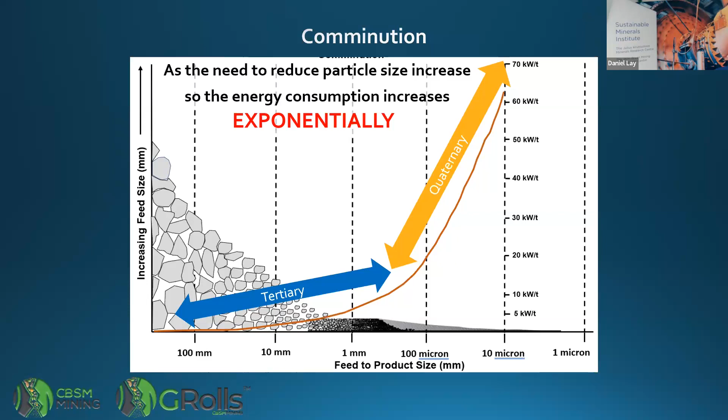In a typical mining operation, comminution takes about 10% of their power consumption, and mining comminution around the world accounts for around 1% of global power consumption. So that 10% of a mining operation accounts for about 1% of the global power consumption.

In the cement industry, comminution accounts for around 70% of an operator's cost, and again that accounts for around 1% of global power consumption. So comminution is a very energy intensive, very power intensive, and very costly part of mining and cement operations.

And with power prices going up, and we're all feeling that pain, it's going to get more and more. Also, another large cost for mining operations is media, which can be up to 17% of cost, and that's a factor that's just there, but people don't really realise how much cost the media adds.

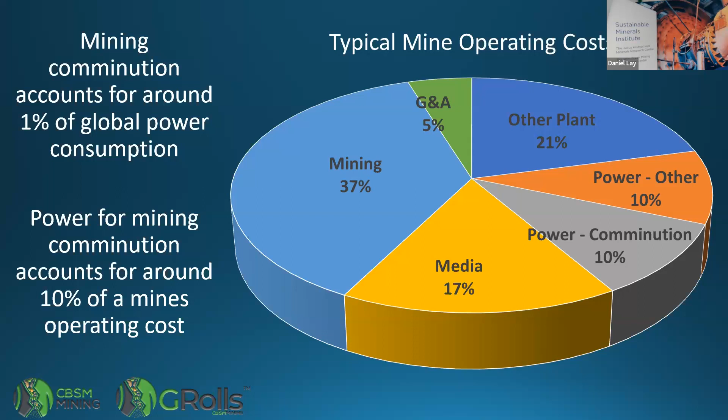For a mining operation, these are all the current comminution type technologies. Going from the top, you get very coarse feed, and obviously it's very difficult to get all in one pass down into your really fine material. So you have a series of crushing and comminution technologies. You go from your primary crusher, which gets the real big rock from the mine, then through a series of crushers and then mills to get to the really fine. Each of those technologies has got a nice sweet spot where they operate really well.

Beyond that, they struggle on that. So this gives a bit of an idea. At the top, you've got your AG mills and your SAG mills. Then there's probably rod mills.

But then in the middle here, we've got HPGR, which is high pressure grinding rolls. And then the VRM is the vertical roller mills. These have started to come into the mining sector as comminution units, and I'll talk about that more later on.

As you get further and further down, they can take some quite coarse feed. But then you get down to the more specialist ones, the ball mills and the stirred mills, and the vibrating mills and that sort of thing, talking about trying to achieve those really, really fine particle sizes that some of the products need, or some of the ore bodies need.

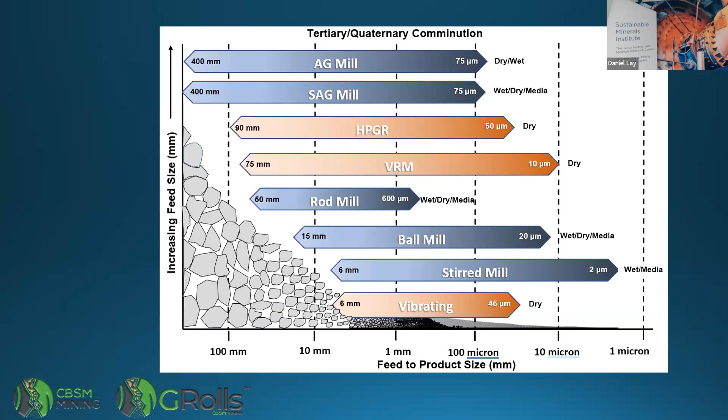Just a quick snapshot of the comminution global market. It's about a $2 billion a year market in 2020. Ball mills are about a third of that market. Now, ball mills are the traditional - I'm talking about ball mills, SAG mills, AG mills, in a similar sort of vein. They're all lumped in there, and they've been the traditional main comminution for tertiary and quaternary.

But what we now have is a large proportion of that taken up by HPGRs and VRMs. HPGRs and VRMs were actually developed in the cement industry and have slowly progressed into the mining industry, and so they're starting to take some of this ball mill market share.

VRMs were extensively used in the cement industry, but now the cement industry globally has peaked out, and so those VRM producers are now looking for new markets to penetrate, pushing into the mining industry to provide products there. So the VRMs had already had a very large market share, but that was mainly up until the last 3 or 4 years, concentrated on the cement industry. Now they're switching to the mining industry.

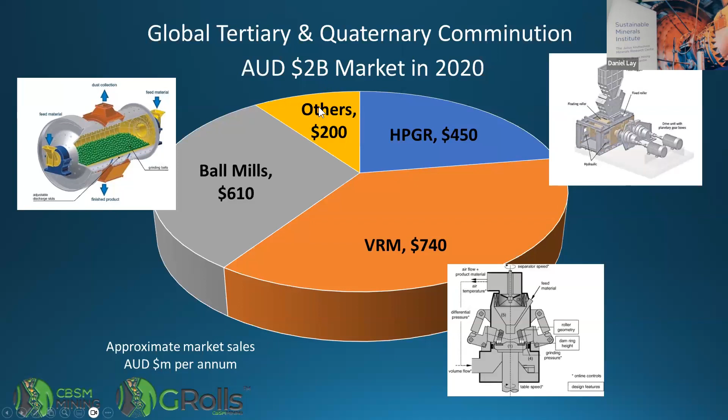The International Energy Agency, in 2022, among the reports they produce every year, did a report on the role of critical minerals in the clean energy transitions. We all know about meeting net zero goals by 2050 and the need to increase our renewable energy requirements, and so critical minerals are, as the name suggests, critical to that. The IEA identified several key risks to meeting those goals by 2050.

First, one of those things is there's a declining ore quality, and ore bodies are more complex, and as a result they have increased and multiple challenges to actually recover those ore bodies. So yes, the easy ore bodies have been taken, and we need to continue to get more and more materials. We need to go into lesser grade, but also more complex and also more remote ore bodies.

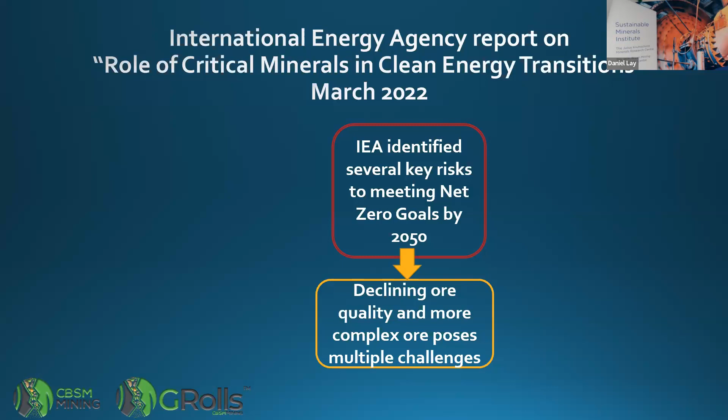It takes 17 years from an ore body being discovered to actual production. So if we're to meet 2050 goals, take away 17 years from that, that's 2033. We need to make sure that we are discovering minerals and resources all the way through to actually meet those goals. Because if we find something in 2040, unless we can shorten that discovery to production time frame, we won't meet those goals.

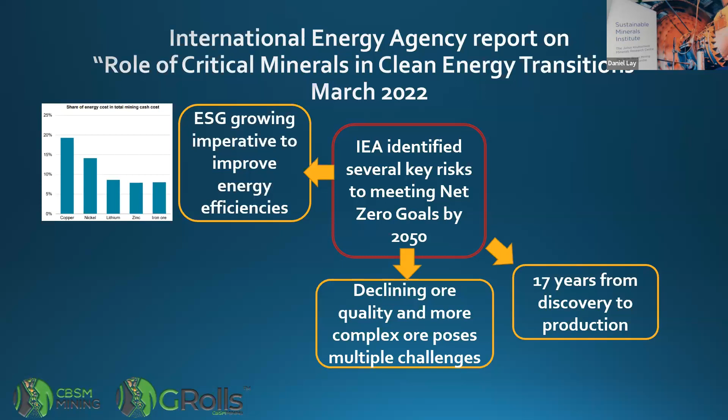Half of the global lithium and copper production are in areas of high water stress, meaning there isn't much water in those regions, or there may be sufficient water but many competing users. So there are large deposits but not much water. Having a mining operation come in and take some of that water creates additional stress to an already stressed location. That's a huge issue.

To meet net zero goals, we need to increase mineral demand by up to six times for some critical minerals. Copper production needs to increase threefold, lithium needs to increase 12-fold, and some other critical minerals have to increase by 40-fold to meet those net zero goals. That's a huge pressure, and the mining sector is increasingly critical to meet them. Rather than reducing the mining sector, we need to increase it.

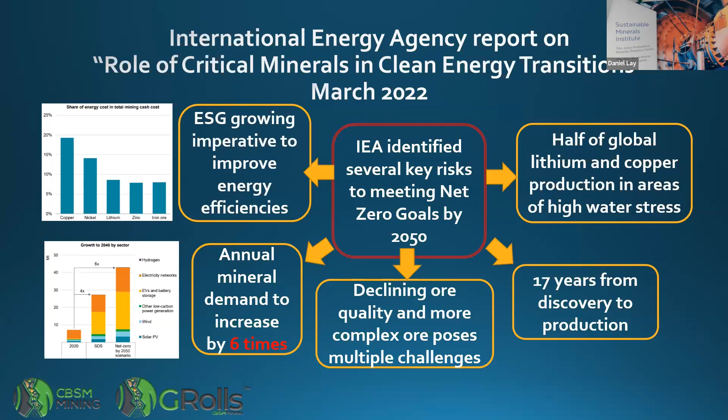What we need to do is change the focus of the mining sector from carbon emission products such as coal for coal-fired power generation to more renewable sources. So the mining sector is needed.

So what are mining trends across the world? Mining companies are committing to reducing their emissions. High-grade projects in low-risk jurisdictions are hard to come by - in other words, all the best ones are already taken, so it's going to get costlier and take more effort. Reserves are located in remote locations, remote from energy, water and transport.

Those reserves need more infrastructure to actually get to them, and as said before, there's declining ore qualities and more complex ore bodies.

So how is the mining sector meeting those trends? HPGRs and VRMs are now starting to be used for dry circuits in the mining sector, in other words trying to reduce the amount of water used in those projects. There's also the use of agile plants, going into smaller volumes, picking those materials out and then moving on.

That's called agile plants - instead of really big massive plants, slightly smaller plants that can spend 5 or 10 years at a site and then move, rather than something there for 40 years. Trying to have a smaller footprint - less tailings dams, less operation of the plant, and a smaller footprint of those mining operations to the community.

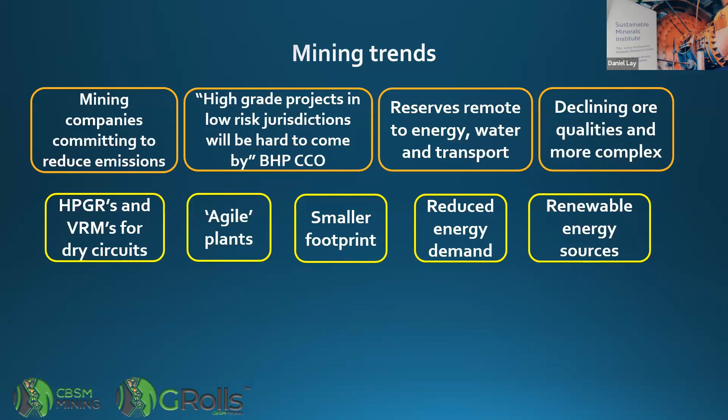In the last couple of years, there have been a few projects announced showing these trends. Oz Minerals at West Musgrave in Western Australia is going to be using 2 VRMs in a dry circuit, using 70% renewable energy, and having several satellite deposits - a main plant with smaller satellite deposits feeding into it. So they're going to a dry circuit. That's copper, I think.

SIMEC Mining in South Australia is looking at using VRMs for crushing magnetite ore in their magnetite expansion. And Grange Resources' Southdown deposit in Western Australia is again using 2 VRMs - instead of ball mills and SAG mills, they're using VRMs to have a dry process as much as possible.

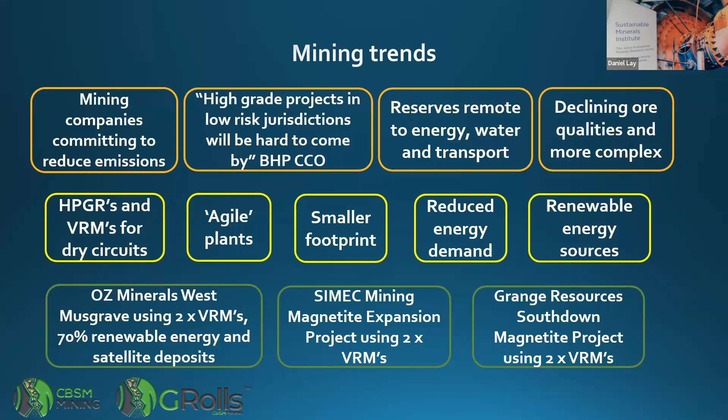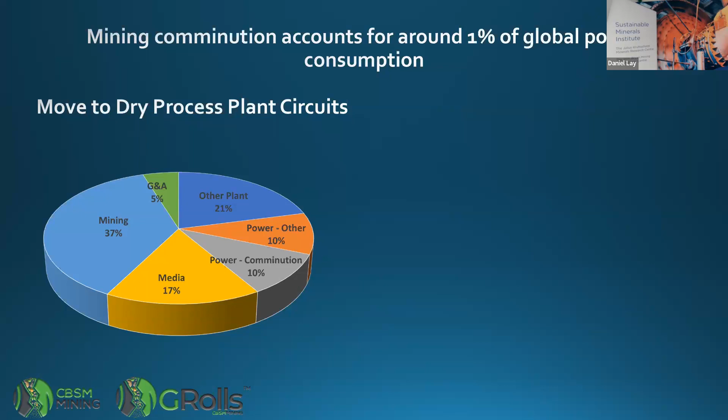Looking back at that pie chart of plant costs, if we move to a dry process using VRM, we're reducing power consumption by about 30%, taking about 3% off the overall power chunk, but with no media - that's a huge cost saving. Going dry is also showing improved ore recovery of 1 to 2%, so you get both cost savings in operating and improved ore recovery.

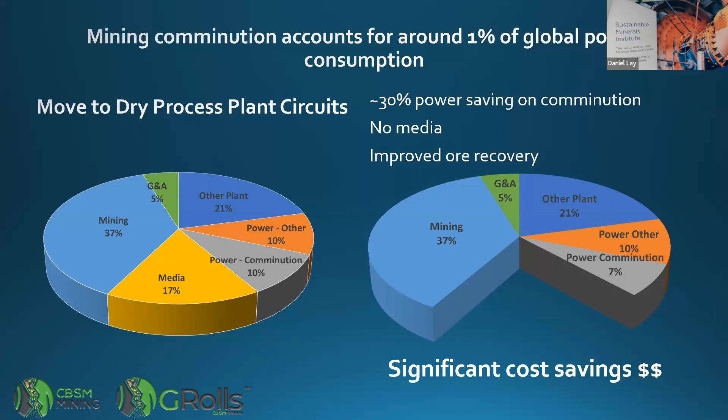So that's the general trends in that. So let's just talk about how we got to my involvement and the technology that we're developing.

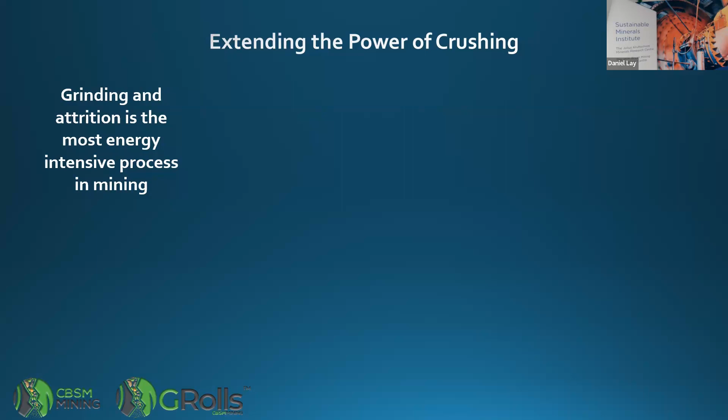Grinding and attrition is a very energy-intensive process in mining, and we all know that. So what we looked at is crushers are a more energy-efficient way of reducing particle sizes, and they require no media. So crushers are used in the primary and secondary, and sometimes in the tertiary, but they're not targeted for getting down to those really fine to ultra-fine sizes that the mineral processors need to recover the ore bodies.

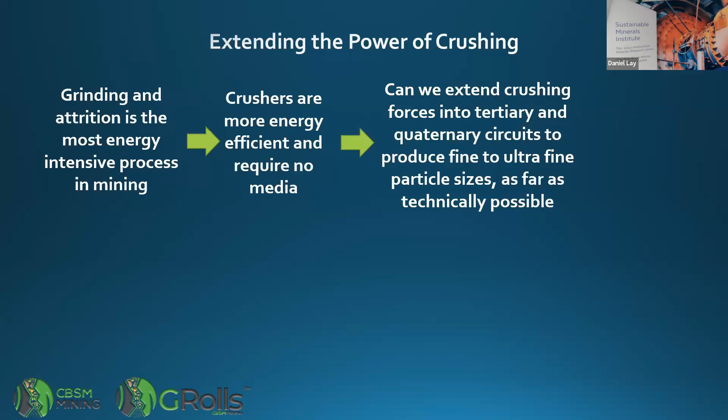So we looked at how can we extend those crushing forces into tertiary and quaternary circuits to produce fine to ultrafine particles as far as technically possible.

So our target was to produce a technology that can produce a high percentage of less than 100 micron in a single pass. By doing that, you're reducing the recirculation loads. It can be used both dry or wet. Most comminution technologies are either dry or wet. They can't be both. Having no media, that's an important thing.

Being energy efficient, and hopefully the use of the crushing forces helps that. A simple design and manufacture, modular, and can be scalable, so we can get into those agile plants. So that's where we developed the concept for the Gyratory Rolls Crusher.

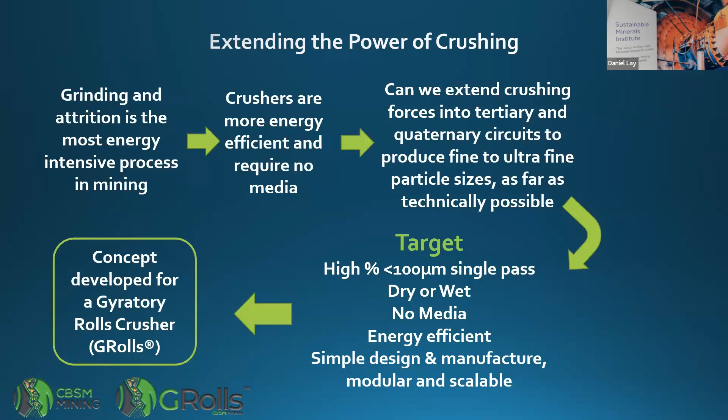So the Gyratory Rolls Crusher is basically looking at what are the disadvantages of HPGRs and using the crushing technology to develop a new technology. So what we've got is 2 rotating rollers, but the rollers are different. A HPGR is a nice flat roller, so they're just using compression only, and they're just using brute force.

We want to produce crushing forces, and so we've actually changed the shape of the rollers to be these chevron shaped or V-shaped with interlinking shapes.

So as you can see here on the right-hand side, what you're actually producing is multiple crushing chambers within a single unit. So instead of having a nice flat plate and then the crushing, we're actually producing lots of different crushing chambers within a single unit. And so those crushing chambers operate

much more efficiently. So what we do is we have the main roll rotating and dragging material in, but we have the other roll actually oscillate or vibrate, and it vibrates a very small distance, so it actually gyrates, creating pulses, going in and out against the main roller. And we've got eccentrics that are 100 micron to 500 micron in size.

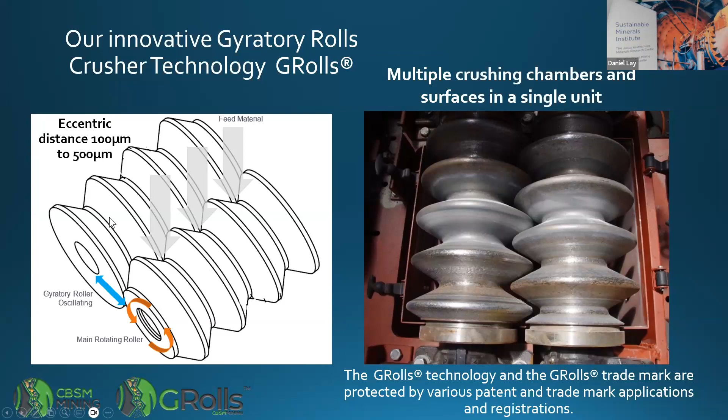So these are all the forces, and part of pushing the crushing technology into there is that you have different compression, shear, and tension. And so here is the jaws, the rollers, and as a particle passes through, or might actually migrate through all that, they're subject to different shear and compression forces. So that's how we get that energy efficiency.

HPGR is purely reliant on compression. We have shear, tension, and compression. So that's how we believe we will be much more energy efficient.

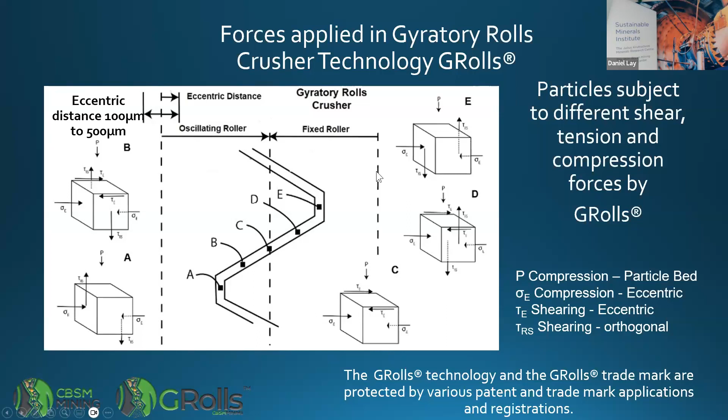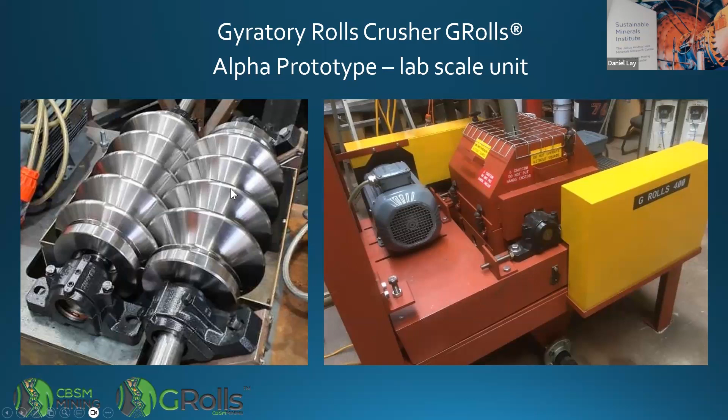So these are the rolls when they're nice and brand new. And this is a lab scale unit that we have built to test the concept. It's an alpha prototype. We built the rolls not with hardened faces, so that we can see what the wear is like over time. And this is the unit.

So it's skid mounted. It's got a control unit. It's a little lab scale.

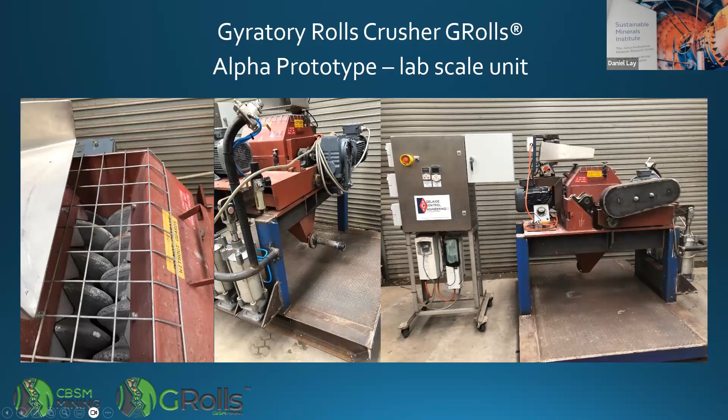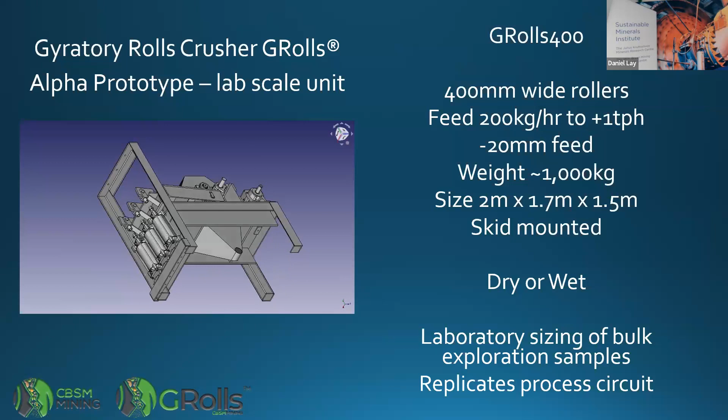So the rollers are 400 wide. We can feed materials anywhere from 200 kilos an hour to up to 1 ton an hour. It will take up to 20 mil feed. It bounces around a bit, but it still does it. We haven't tried anything bigger than that, but as we think about upscaling, we can get a larger feed.

And the unit's about 2 meters, and that's skid mounted, so we can use it dry or wet, and it's good for laboratory sizing of bulk exploration samples. You can put materials through, but also you can test your product going through, and it actually replicates the process circuit quite well. So you don't need other test methods to try and correlate. What you put in, you measure the energy, that's the energy consumption, and the product that comes out is exactly what you would expect in the process.

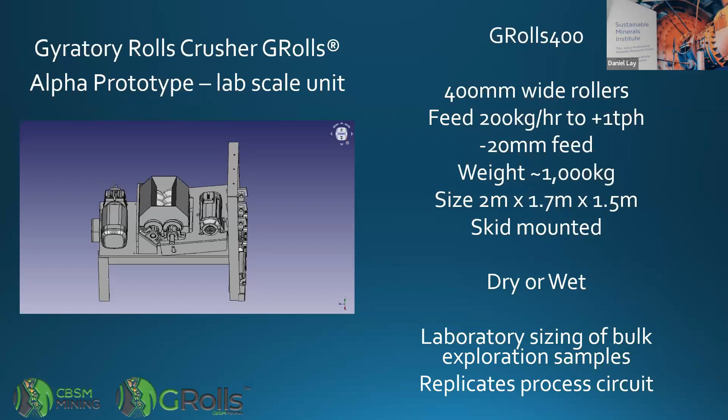Sorry, I've had a cold this week, so talking, starting to get it going.

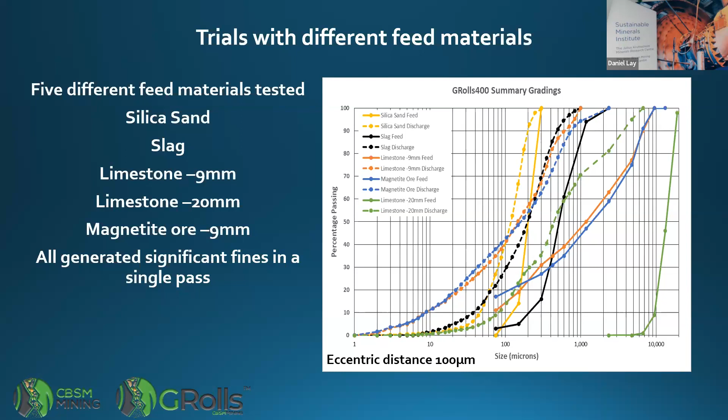So then we looked at changing the feed material sizes and seeing how it improves things. By going coarser and coarser material, we're still getting very high fines generation when we're going coarser. So that's up to 20 mil feed, and we're getting very similar material coming out the bottom end.

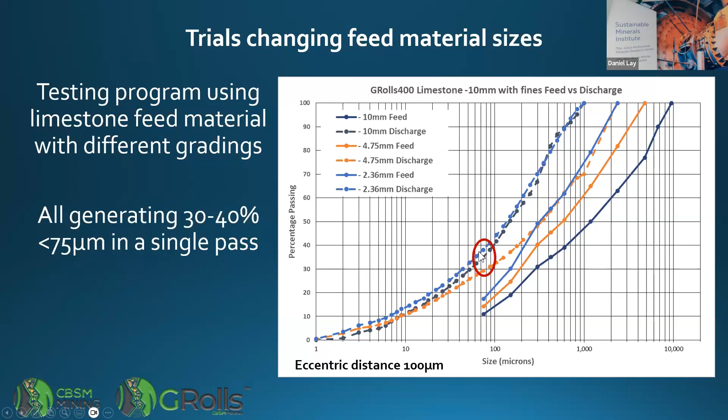So going through a whole lot of feed sizes, one of the things about comminution is trying to see how much your reduction ratio is, and how the reduction of your particle size works as a single pass.

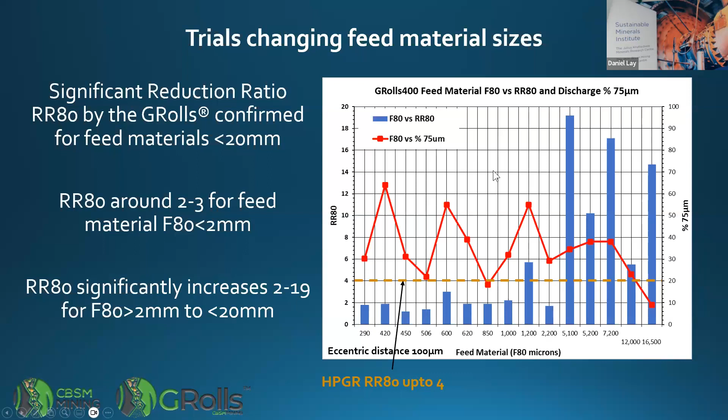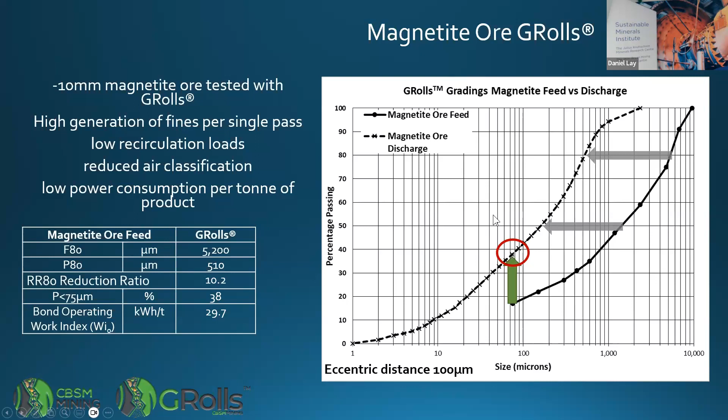We crushed some magnetite ore, and we got very high fines generation, 38% generation of a 10 mil magnetite ore in a single pass. When we compare that to a HPGR, the HPGR only got about 18%. So in other words, we got more than twice the amount of fines generated in a single pass than a HPGR. That's very encouraging, and it works by actually reducing the number of recirculation loads, and there's less air classification needed, so therefore lower power consumption per ton of product.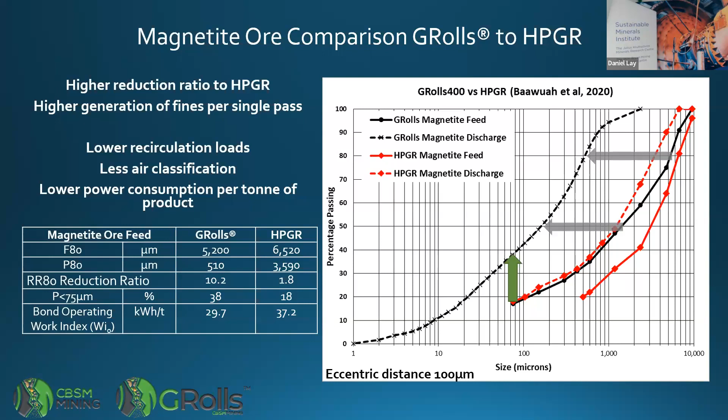We think that's because with increased speed, you're going from crushing and shearing to straight crushing, trying to jam the material down through that gap, and so you're exerting lots of energy.

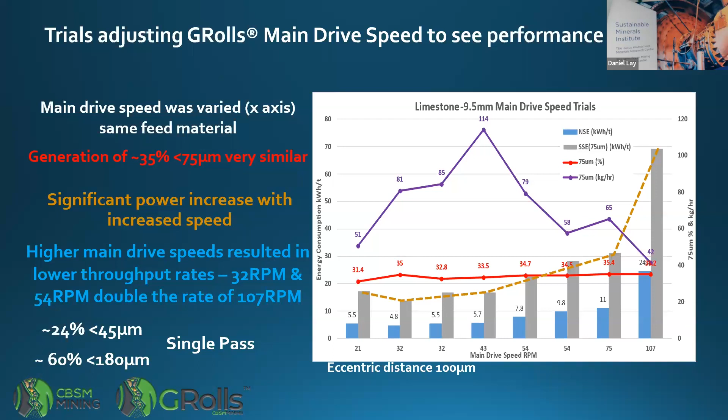So for each of the materials, you do a whole lot of work on it - this is the revolutions, the main drive speed. What you try to do is match the amount of oscillations of the gyration against the main drive to get that shearing, tension, and compression as much as possible. That previous slide was for minus 9.5 mil.

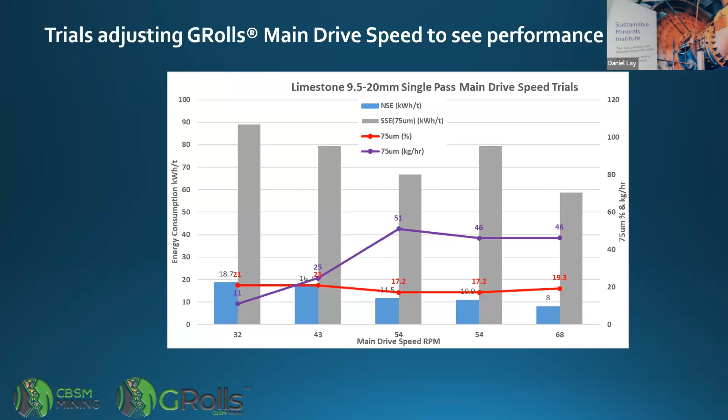When we went to the more coarser material, we found that dropping the speed actually reduces your productivity and energy, so you need slightly higher speeds because of the bigger materials. So what it suggests is that for every material you need to do a whole lot of tests to work out which is the sweet spot.

In the GRolls, we've got 3 main configuration levers that we can change to affect the performance of the unit: the main drive, the oscillation speed, and also the applied load. Like a HPGR, the rollers are actuated against each other, and there are mechanisms so that if it bogs down or jams, you can release it. So that applied load is a factor as well.

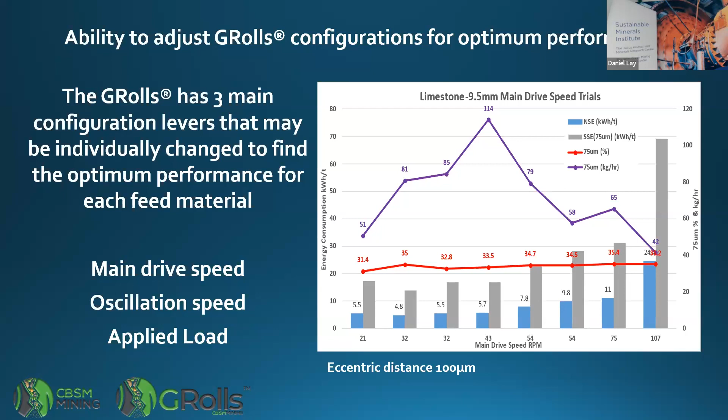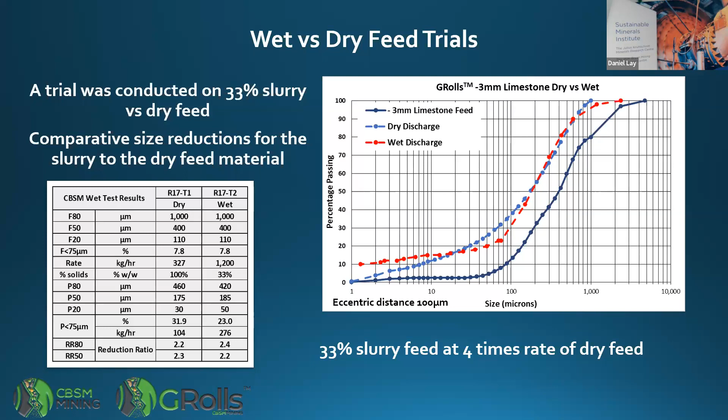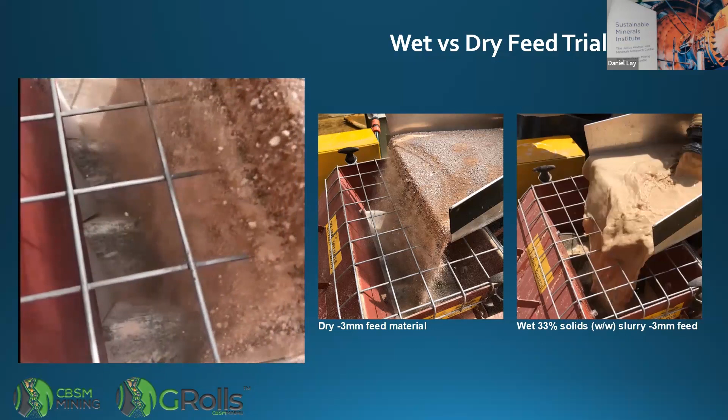So this is the material going through dry. You'll see the rollers moving around - it's actually quite slow, this is slowed down. And then this is the slurry - same material, but in a 33% slurry.

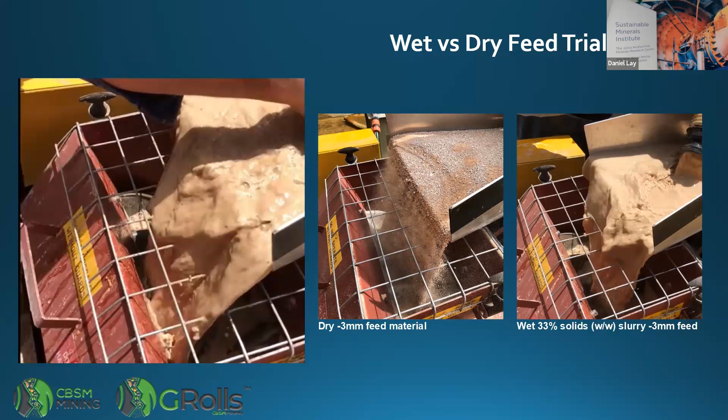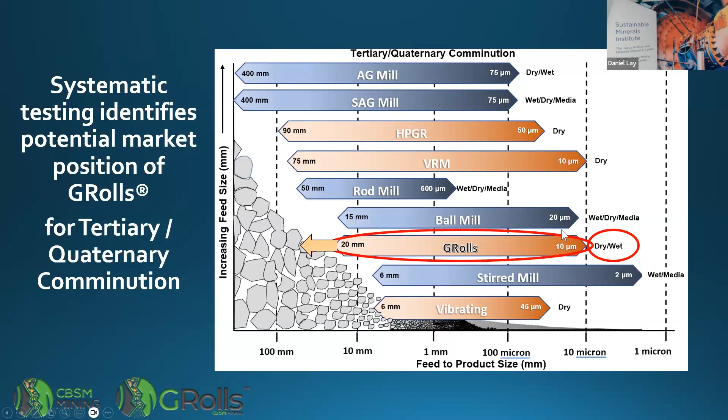So what we've shown is that we can actually slot the GRolls in amongst all our competitors, all the existing tertiary and quaternary comminution circuits, and we can do it both dry and wet, and get down to that 10 micron size. So we developed a concept design for upscaling to the next size. We had a lab scale, but we need to commercialize it, so we need to upscale. That's what we've developed - a 3 to 5 ton unit.

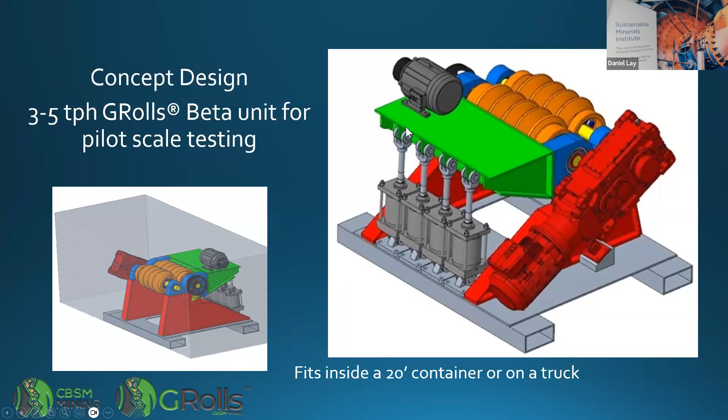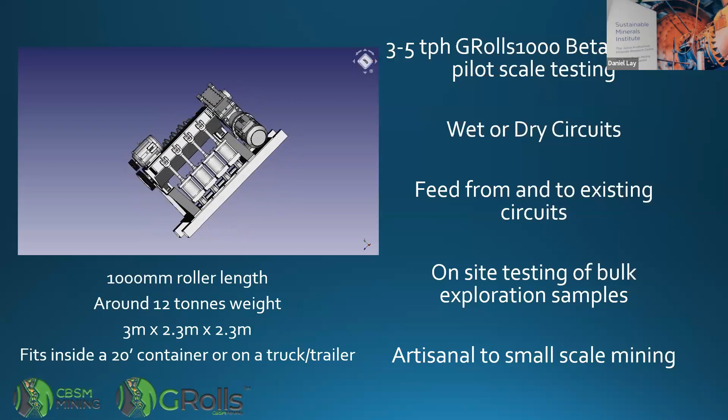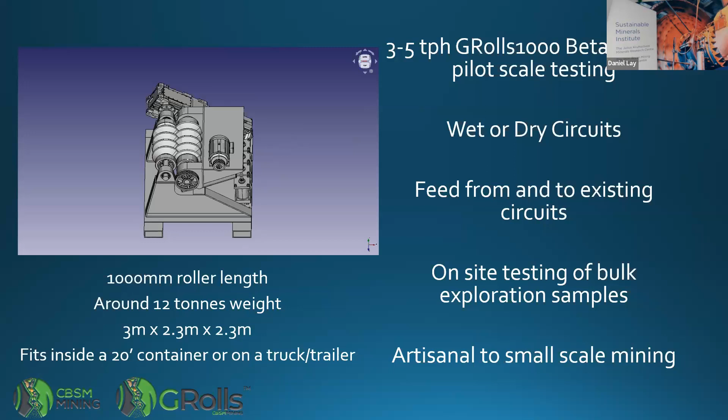It'll be able to sit in a truck or in a container. This is mainly just the main configuration with the actuators, the main drives, the rollers here. That unit will be used for wet and dry circuits. We can add it to existing circuits, take feed from it, and feed that material back in. Or we can do on-site testing of bulk exploration samples, or use it in small-scale mining and artisanal operations.

What we plan to do is have that 3 to 5 tph unit prove the commerciality of the technology, and then we'll start building larger units, progressively larger units.

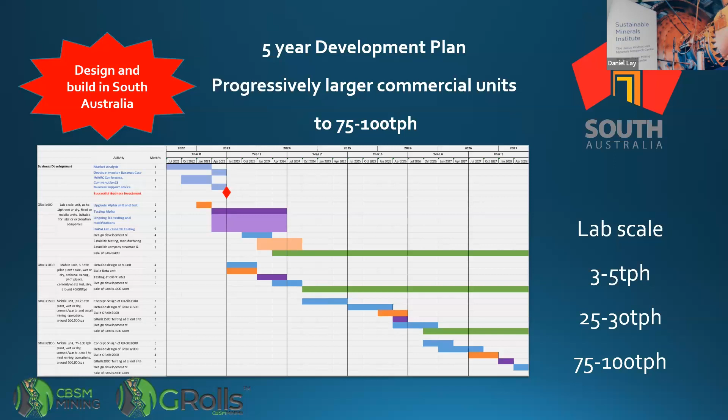In summary, we believe our GRolls technology can achieve similar energy or media savings to HPGRs and VRMs in dry, tertiary, and quaternary circuits. We can actually operate in wet regrind circuits, and we can even process tailings - there's a whole focus on going back into tailings dams and winning material from old tailings. It can be modular and mobile because the unit is much smaller than HPGRs and VRMs, making it more suitable for agile plants. We've also got units that are mobile laboratory and small scale, which we can use for pilot plants, exploring, and testing critical mineral resources.

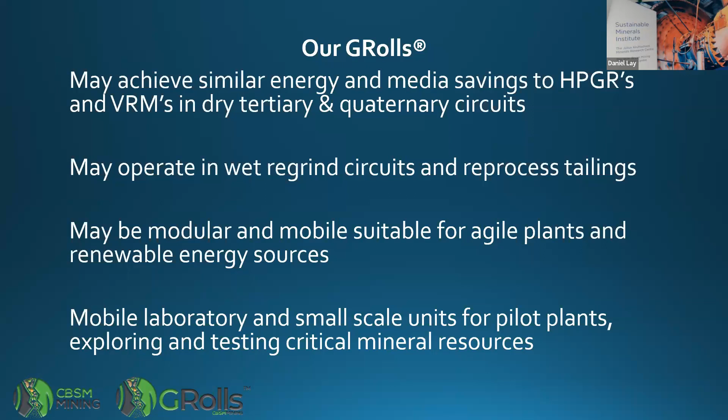I'd like to acknowledge Chris Kelsey, who's the inventor of the technology, who passed away last year.

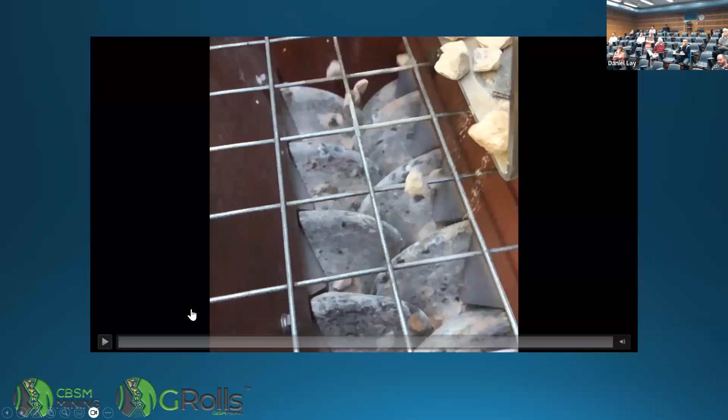Hopefully it works. So this is 20 mil, and you can see it going into the crusher, and there are all different little crushing chambers in there, and you can see the material getting compressed into those pinch points. That's what happens with coarse material. When you do fine material, you have more material on those surfaces doing shear. So with coarse material, you're probably more doing compression - yeah, looking brute force.

But it's very similar to a primary crusher. If you look at a jaw crusher and stuff like that, it's very similar. But what we try and target is the very fine product size.

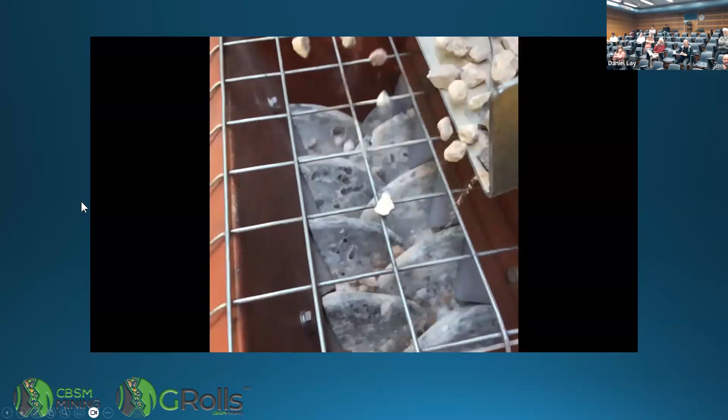All right, so we'll start with an online question that we had. This question comes from Paseo. So HPGR roll wear, roll surface design and material selection were important issues with only compression being used. Do you believe that the lining and surface protection and materials construction will be the main challenge for the success of this new equipment?

Yes, and it will be similar. All the wear is on those rollers, very similar to an HPGR. We haven't looked at different lining technologies, and there'll be different lining requirements for different materials. So yes, that's where the wear is going to be. But I suppose the beauty of it is that it's a very simple operation to remove and replace those rolls, so you could have liners that are less robust, more sacrificial rollers, and then pull them out and put new ones in to replace them. Or you could laser bond them, or heat treat them. There's a whole range of liners.